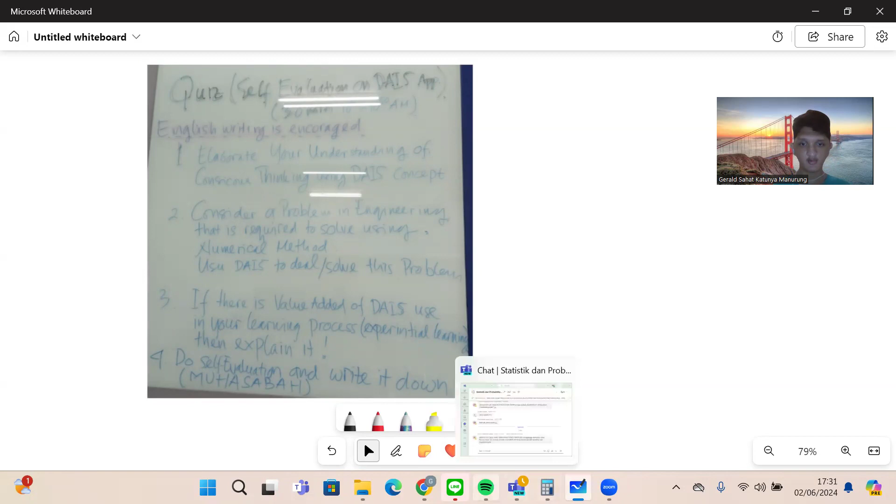Untuk soal penyelesaiannya yang pertama, saya akan mencoba menjelaskan dalam bahasa Inggris. Because English writing is encouraged, speaking in English is also encouraged. The first question is: elaborate your understanding of conscious thinking using the DAI5 concept. Okay, let's move on to answers.

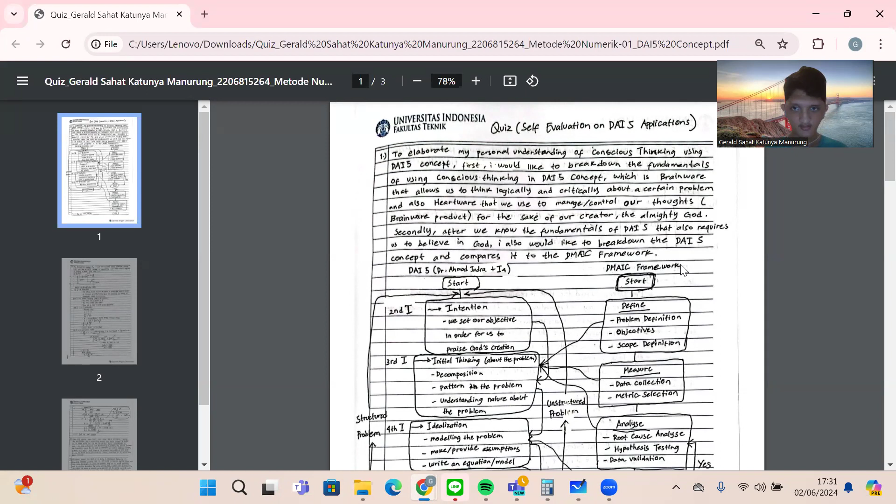Okay, for the first question, elaborate my understanding. So my personal understanding is the conscious thinking is very well used in the DAI5 concept. To elaborate it furthermore, firstly, I would like to break down the fundamentals of using conscious thinking in the DAI5 concept, which requires two things: brainware, that allows us to think logically and critically about a certain problem, and also heartware, that we use to manage or control our thoughts.

And secondly, after we know the fundamentals, it also requires us to believe in a higher power, God. So in order to break down the concept, I would like to compare it to another framework, and in this occasion, I'm using the DMAIC framework. First of all, the DAI5 starts with a starting point, and then comes an intention, which we set as our objective, to focus us in order for us to praise God's creations.

And then we came to the next step, which was initial thinking about the problem. We decompose, we find the pattern of the problem, and then we understand the nature of the problem. Moving on, we came to the next step, which was idealization. We create the modeling for the problem, and then we provide some assumptions to solve the problem. After that, we write all the equations or models required to go to the next step, which is instruction set, where we set some algorithm or completion steps.

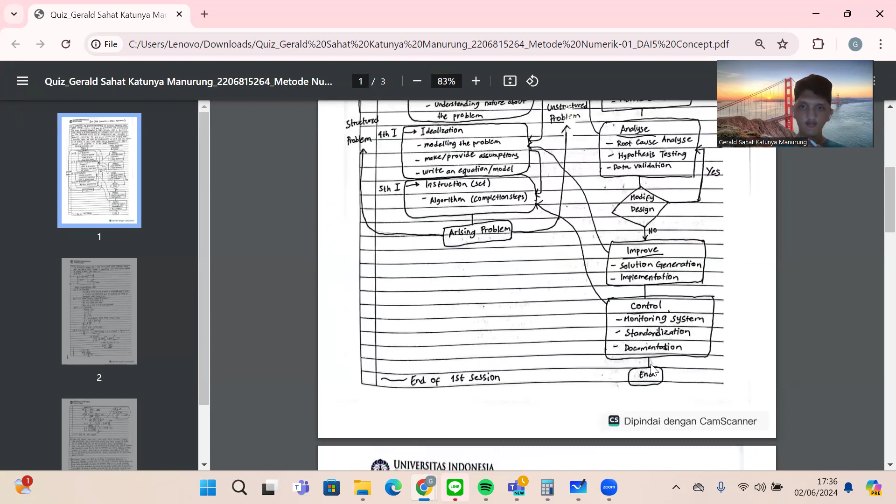And the next step was control, where we monitor our systems and we standardize it. We make some standardization, and we documentate — we document it, documentation — and then it ends with the ending point.

So if we compare the two frameworks or the two concepts between the DAI5 and the DMAIC, as you can see from the screen, the define, measure, and analyze steps of the DMAIC framework are also found in the initial thinking steps, but also the improve and control steps are found in the idealization, and the control is in the instruction set steps. But the one that gets a little upper hand between the two frameworks is that...

The DAI5 concept offers us the freedom to go back to the starting point. On the other hand, when we want to modify the design using the DMAIC framework, it only offers us the option to go to the analyze step.

Okay, moving on to the next question. Consider an engineering problem in the engineering field that is required to solve using numerical methods, using DAI5 to deal with or solve this problem.

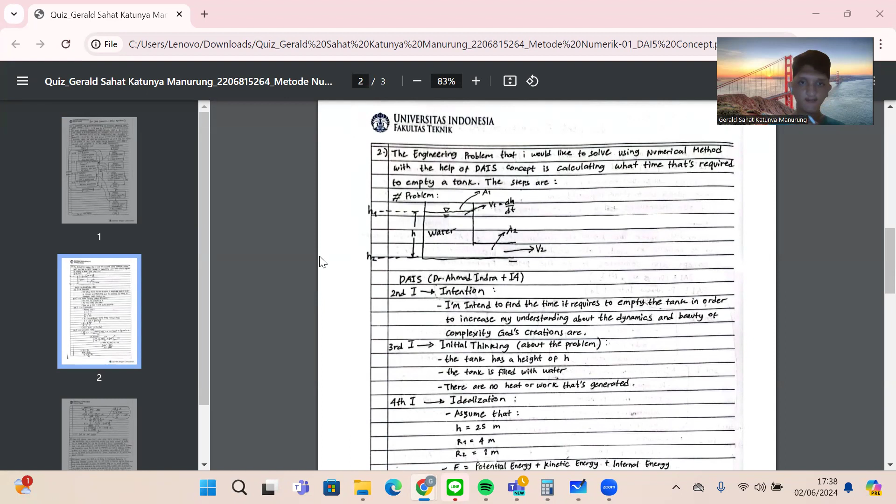For the second question, the engineering problem I would like to solve first is at what time it is required to empty a tank. The problem scheme is like this: there's water in the tank, there's two areas, and there's a difference in velocity and also a difference in height, and so on.

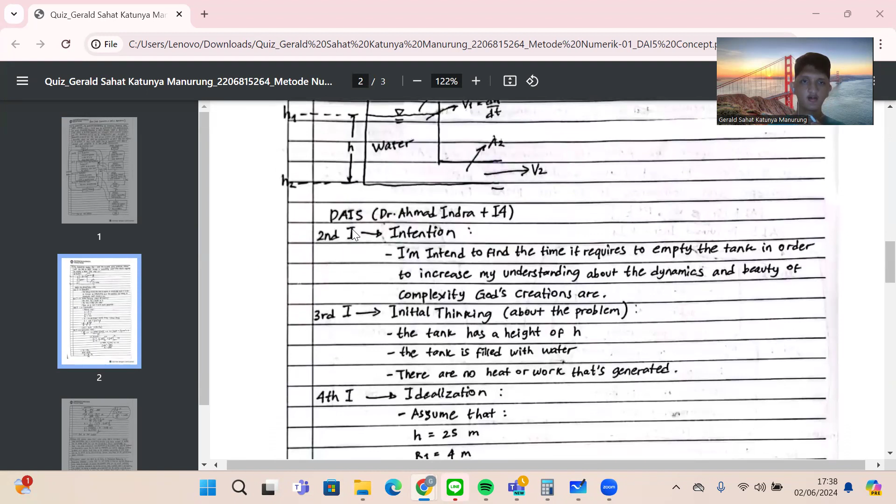After the problem scheme is showcased, the next step is intention: I intend to find the time it requires for the tank to empty, in order to increase my understanding about the dynamics and beauty of God's complex creations.

The next step is initial thinking about the problem, where I make some assumptions. I note that the tank has a height, labeled h, and the tank is filled with water, the fluid is water. The next step is idealization, where I define some assumptions.

The height is 25 meters, the first radius is 4 meters, and the second radius is 1 meter, the smaller one, the exit radius.

E stands for potential energy plus kinetic energy plus internal energy, where the formula is mass times gravity times height, plus half of mass times velocity squared, plus u, where the internal energy here is zero.

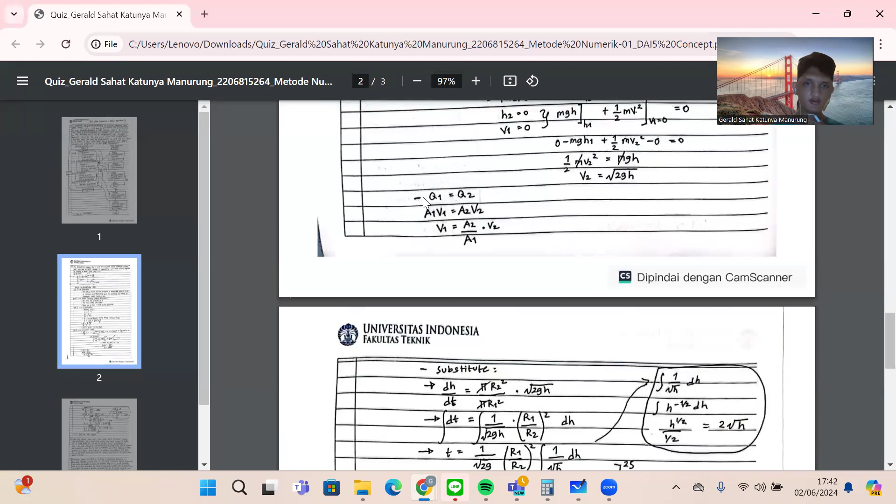After that, we use this equation, the continuity equation, where we find that the first velocity equals the second area divided by the first area, times the second velocity.

We substitute the definitions from the first half, where the first velocity equals the differentiation of height with respect to time, and the area formula is pi times r squared for both areas.

Then we substitute the second velocity with the square root of 2 times gravity times height.

We integrate it, and using the integration, we find that t equals 1 over the square root of 2 times gravity, times the first radius over second radius squared, times the integral of 1 over the square root of height with respect to h. We input our values, and the time required is found to be 36.12192 seconds.

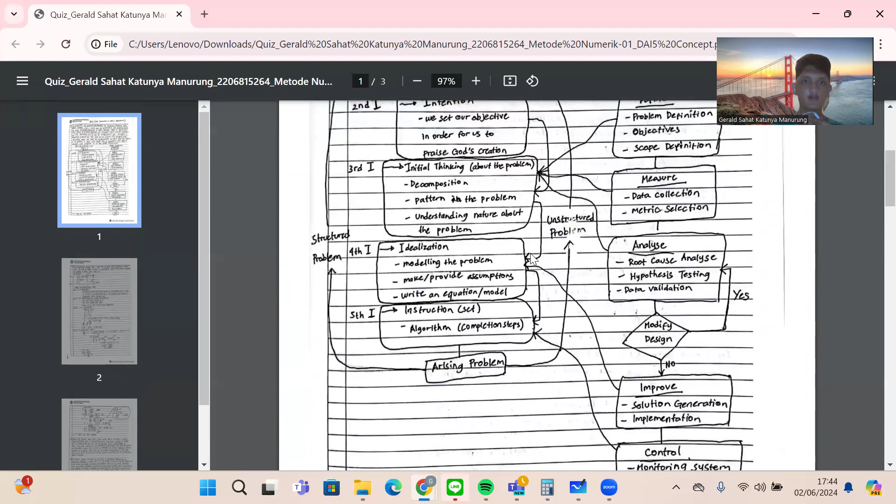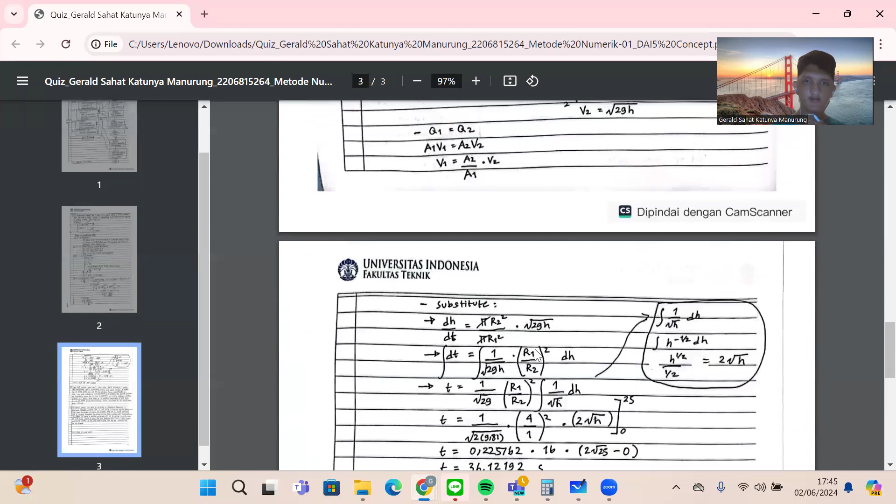Moving on to the next question. We're going to stick with that question, where we add another engineering example that we can solve using this DAI5 concept or DAI5 framework. I'm already prepared with it.

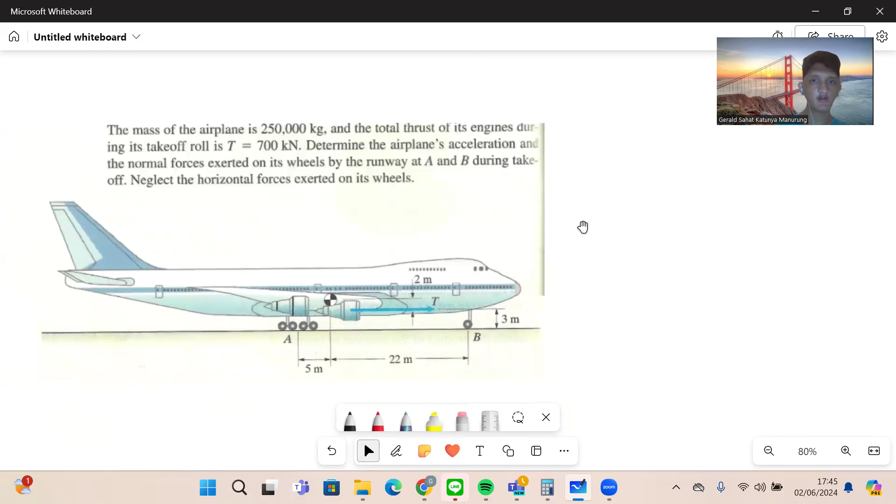This is the engineering problem where there's an airplane with these parameters: the mass of the airplane is 250,000 kilograms, and the thrust force in the engine is equal to 700 kilonewtons. We are asked to determine the airplane's acceleration and the normal forces exerted on its wheels by the runway at points A and B during takeoff. We can neglect the horizontal forces exerted on its wheels.

Okay, now, wait, let me get rid of this first. Where should I put it out? Nah, I'll just put it there.

Okay, first we set our intention, which was to find the airplane's acceleration and the normal forces.

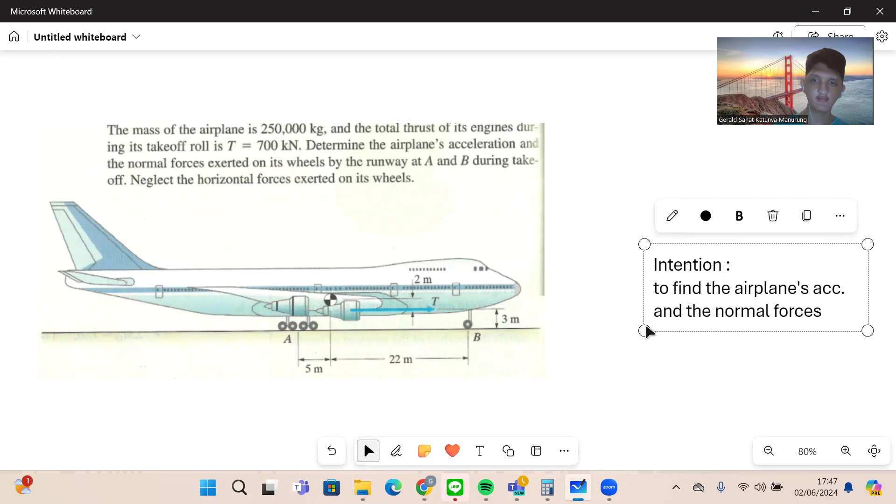Okay, in order to understand how forces act on the plane and the beauty of God's creations are, is that our intention?

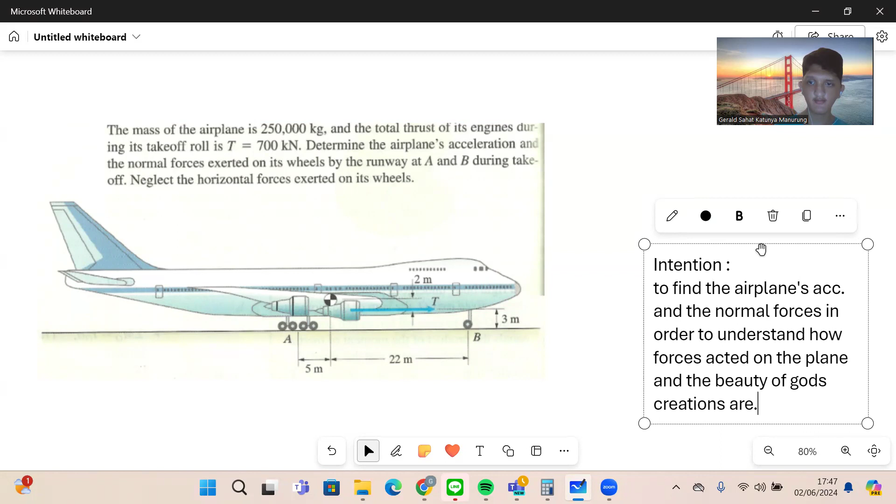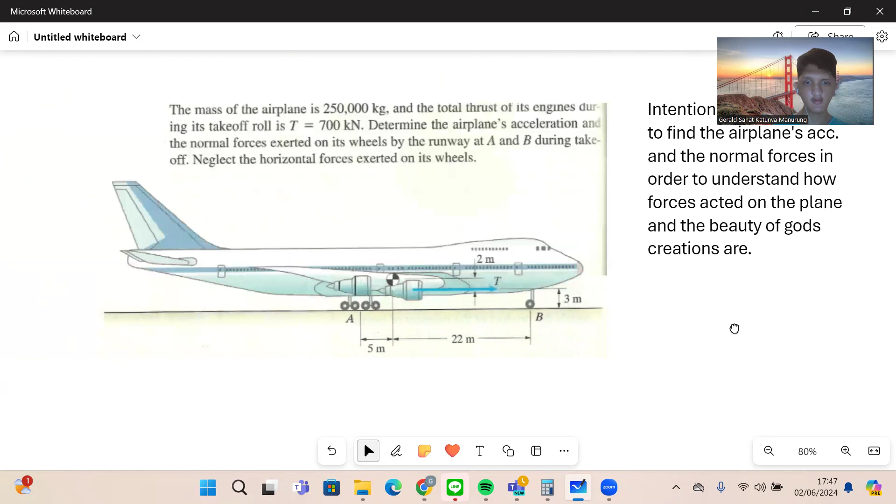Okay, this is the first step. And then the second step is to set the initial thinking about the problem, where in here we can make some assumptions.

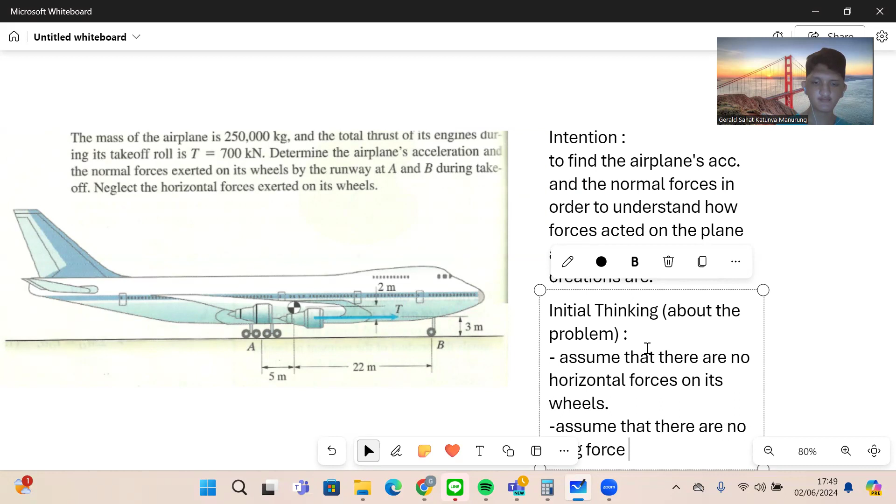Assume that there are no horizontal forces on its wheel, and then I would like to assume that there are no drag force.

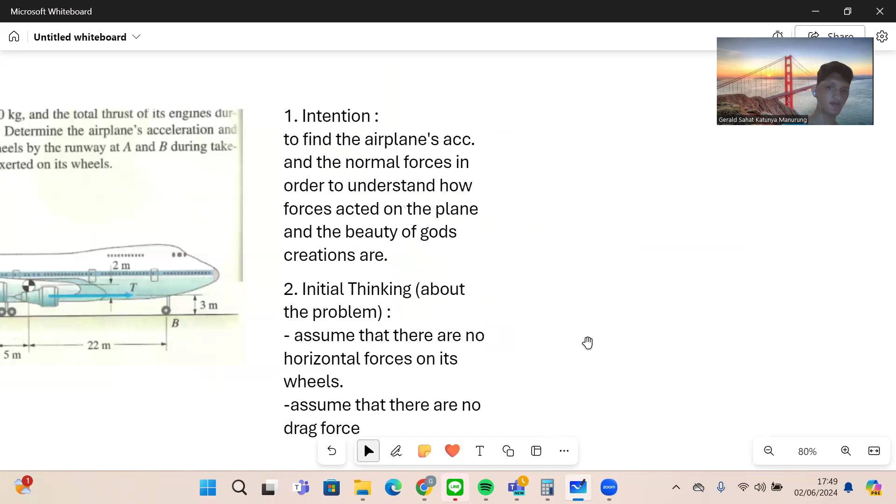Okay, so this is the second step. Let me label it. This is the first one, this is the second one, and then we're moving on to the third one, which is the idealization, we put our models.

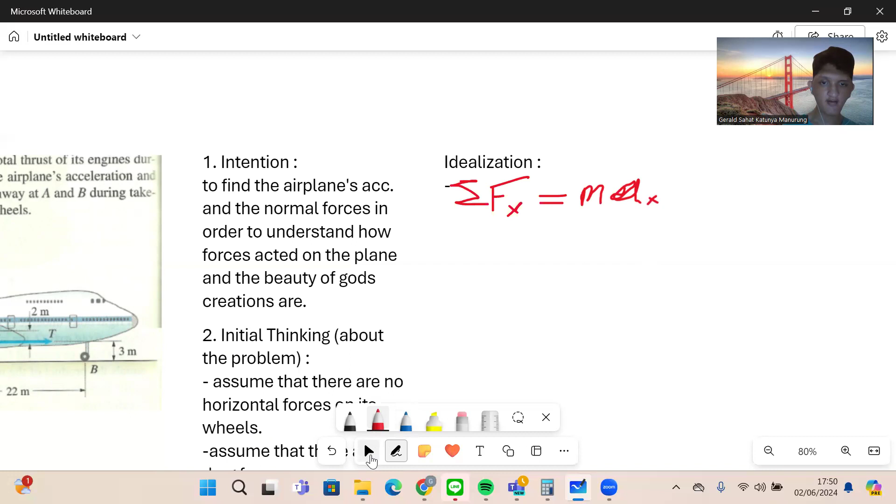We use the formula: total forces acting on the x-axis is equal to the mass times the acceleration on the x-axis. Okay, this is the first one.

The second one, forgive me for my bad writing. Their total forces acting on the y-axis is equal to 0.

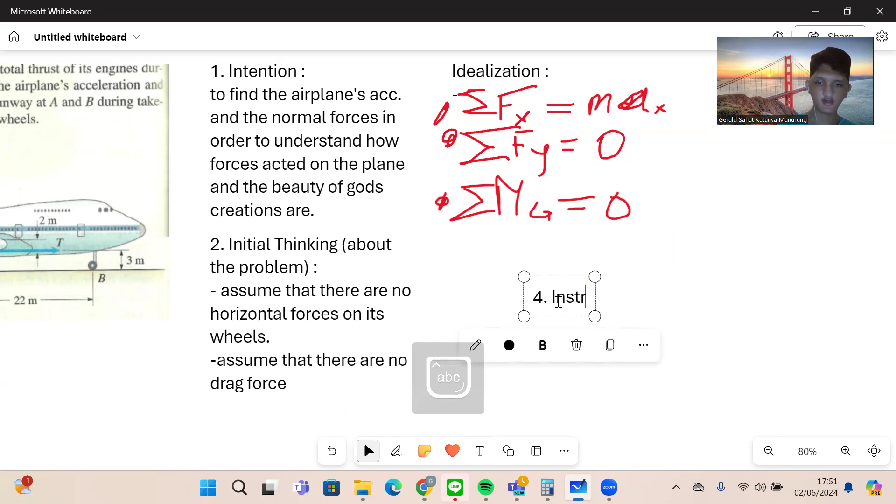And then we also use the total of moment with respective to the centroid is equal to 0 as well. Now we're moving on to the next step, which was idealization — no, I mean, four, instruction set.

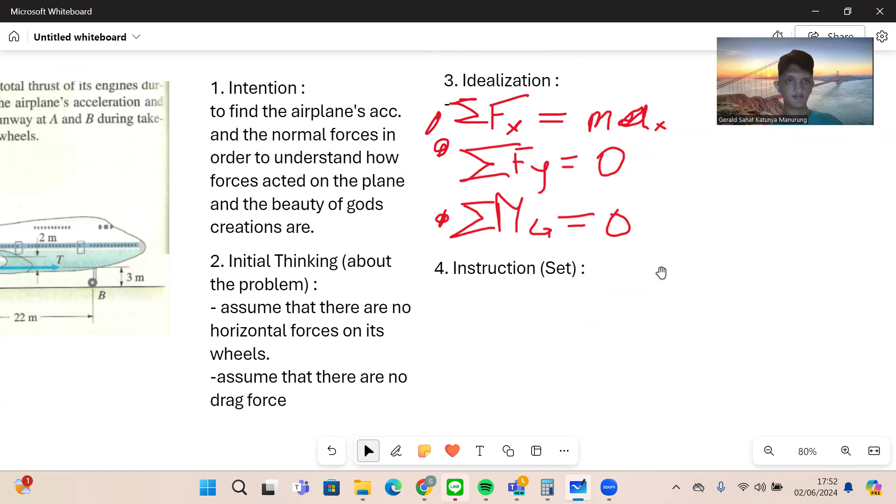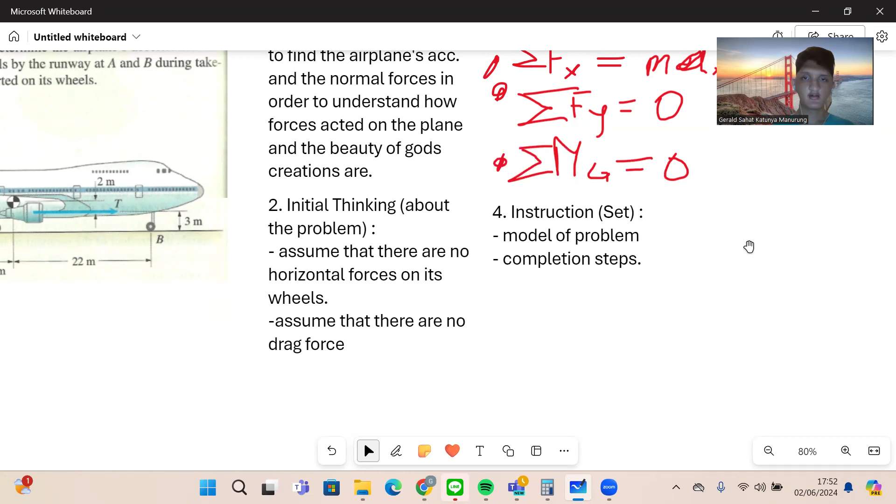Okay, this is the third step. And then in the instruction set, we made a model of the problem, and then completion steps done. Okay, now let's make the model of the problem where we draw the forces.

There is thrust, yes, this is thrust. And then we have the weight of the airplane. We also have, wait—

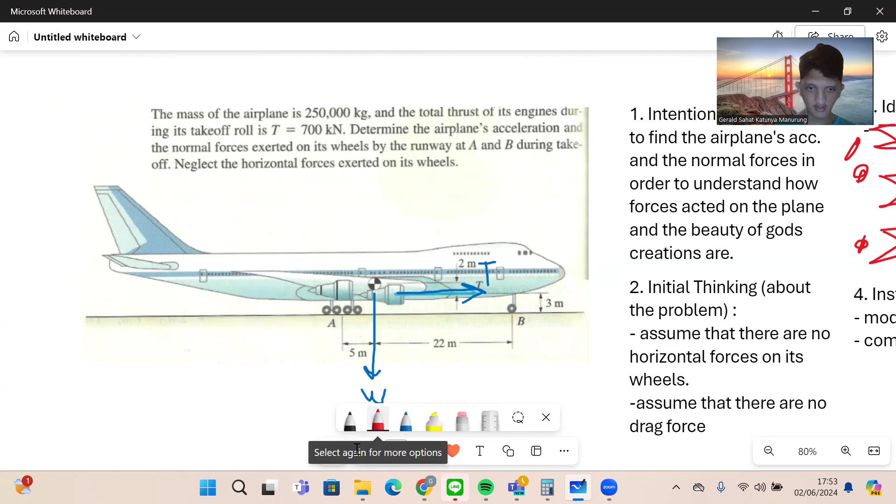We also have the normal force acting on point A and the normal force acting on point B.

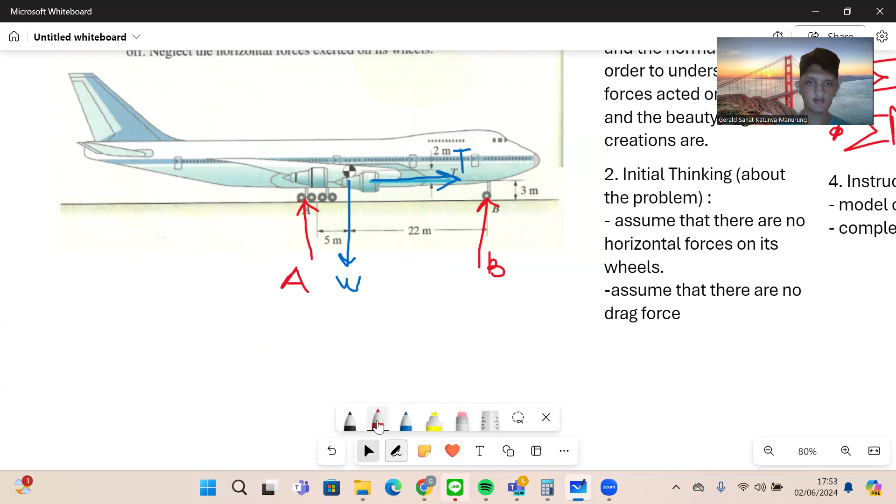After we create the model, we calculate. Okay, now let's calculate it. The first one is the total force acting on the x-axis is equal to mass times its acceleration in the x-axis.

And as you can see in the model, in the free body diagram, the force that acts on the x-axis is the thrust force, and it is equal to—what is this?

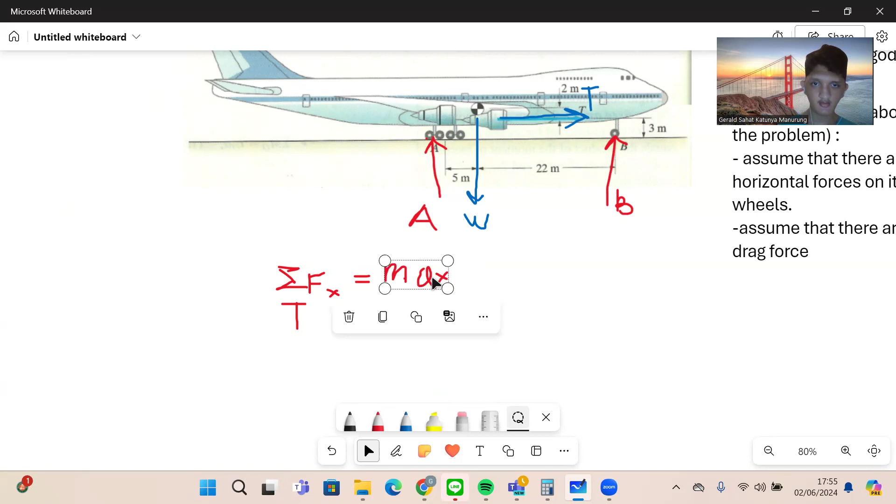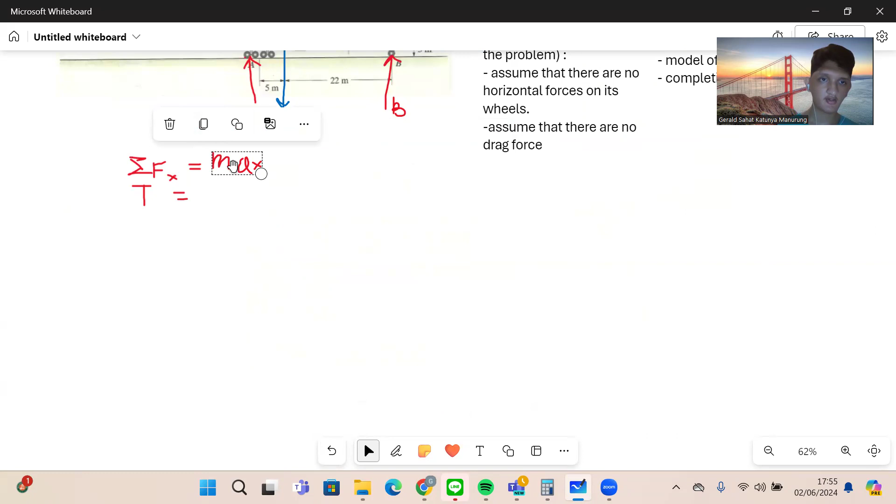Let me make a copy of it. It is equal to its mass times its acceleration.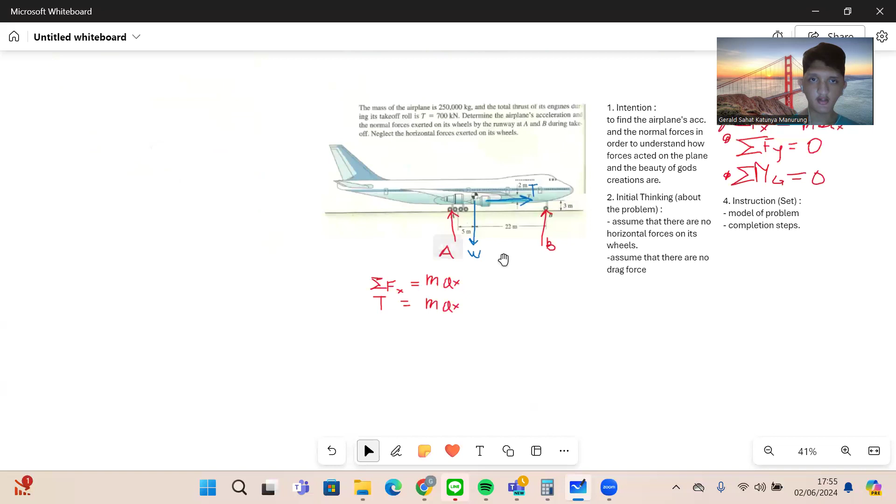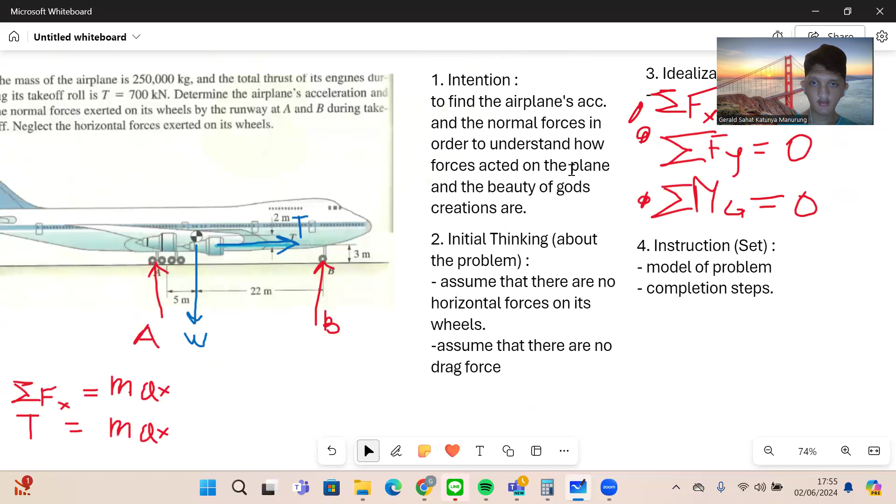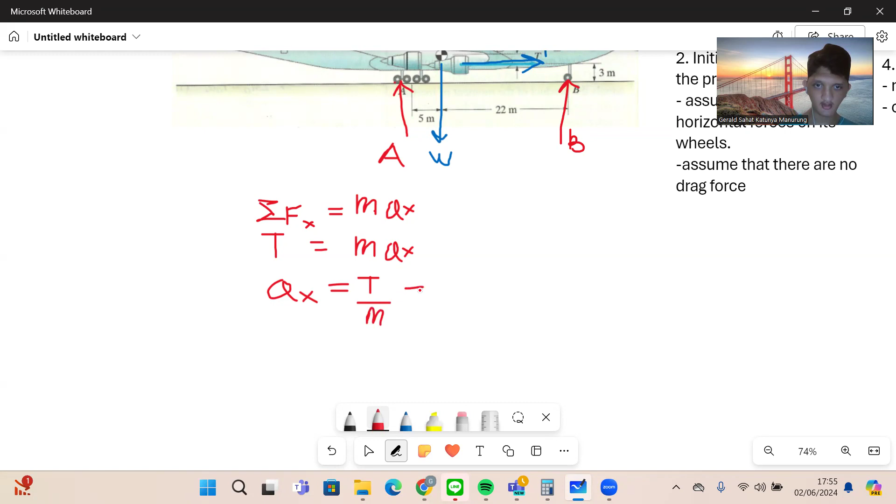And the thrust force is 700 kilonewton. But we are asked to determine the acceleration, so it will become: acceleration in x-axis is equal to the thrust force over its mass, which is 700 kilonewton — forgive me for my bad writing — divide by 250,000.

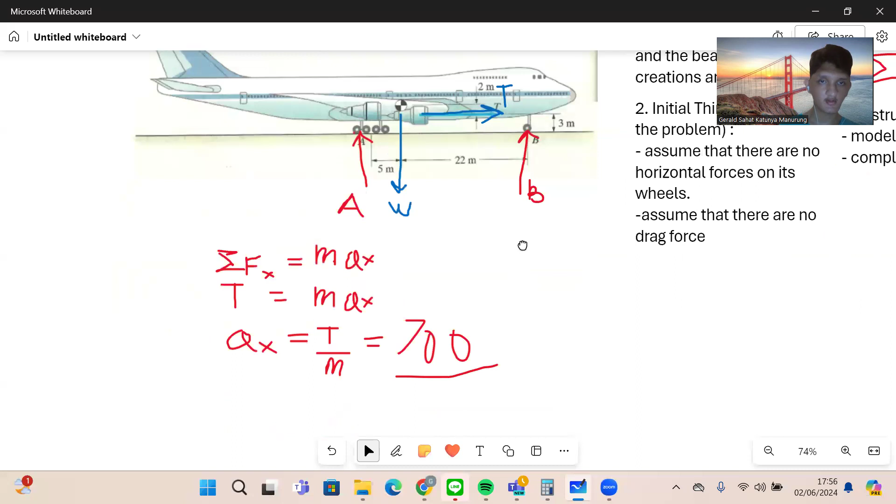250,000. And it is equal to 2.8 meters per second squared.

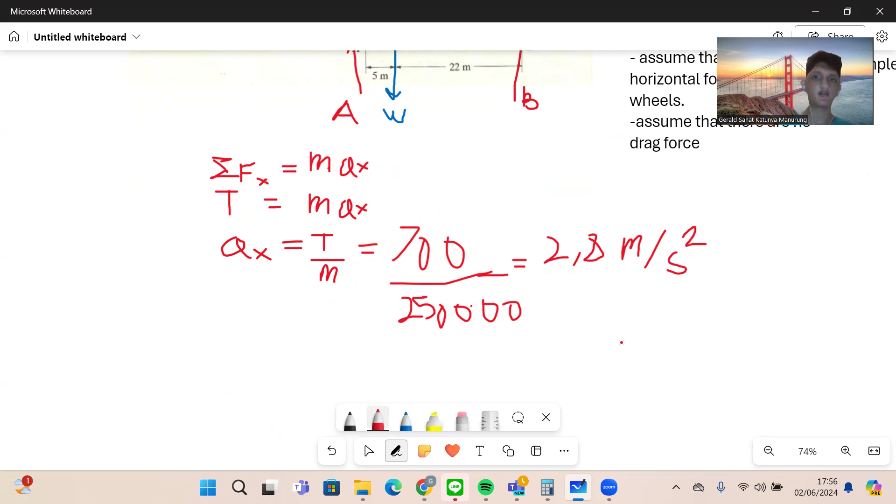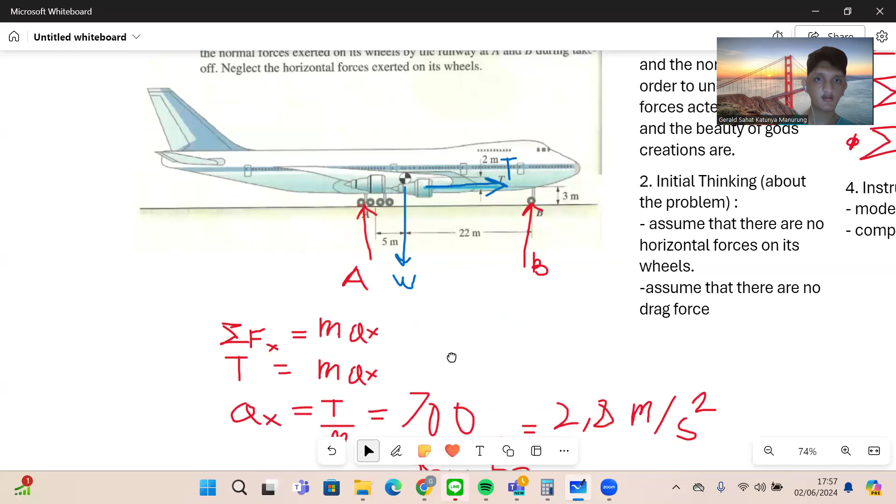And then we're moving on to the next equation, which is total force acting on the y-axis is equal to 0. From the free body diagram, you can see it is the normal force A, normal force B, and the weight force. Assuming that upward is positive and downward is negative.

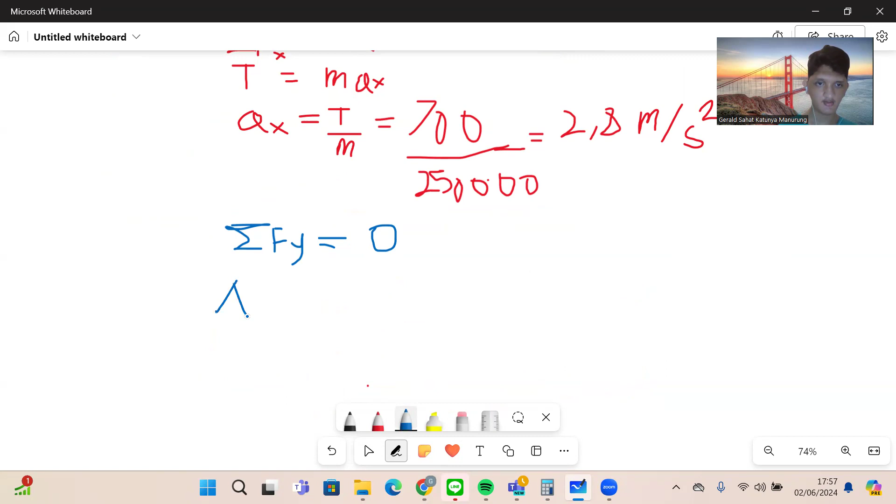So A plus B is equal to its weight. So I'm just skipping some steps to fast forward the completion steps.

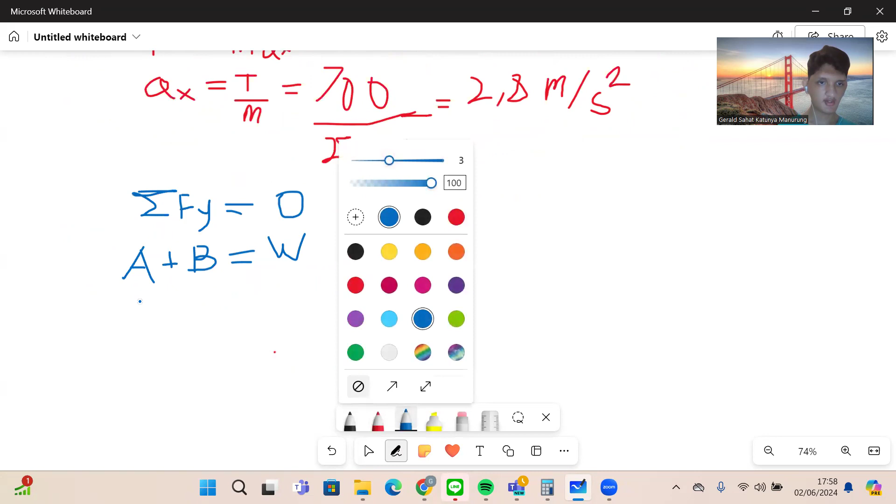Moving on, you can substitute its value. So A plus B is equal to 250,000.

I pick this one, copy, and paste. This one multiplied by the gravity, 9.8, and it gives us 2,452,500 Newtons.

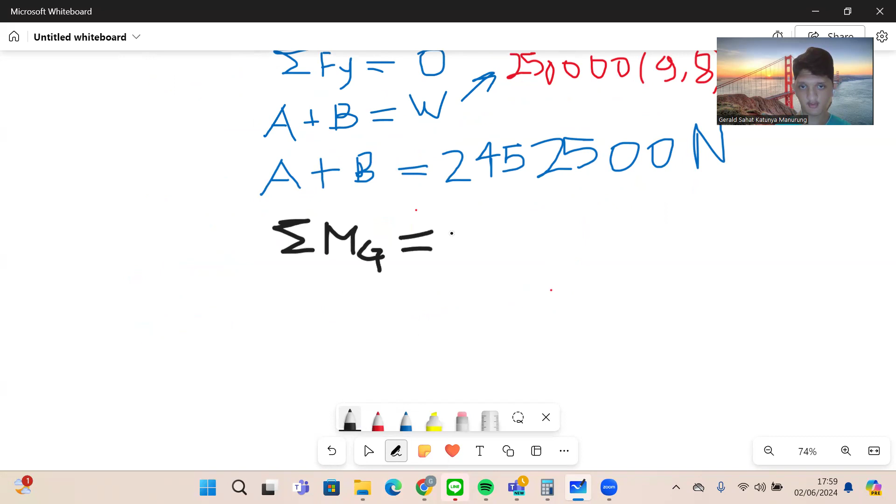Okay, moving on to the next step. The total moment with respect to its centroid is equal to 0, where I assume that going clockwise is negative and counterclockwise is positive.

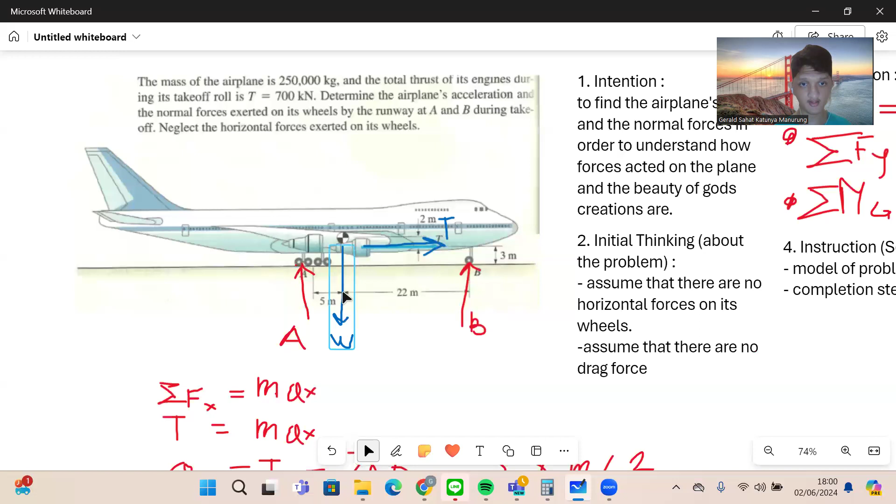So the B point is counterclockwise, the thrust force is also counterclockwise, whereas A is clockwise. The weight is excluded because it has no position — its position is exactly at its centroid. Okay, so this will be—

T times 2, plus the B times 22, A minus... no, I'm just going to fast forward it. So it's equal to A times... minus A times 5 is equal to 0.

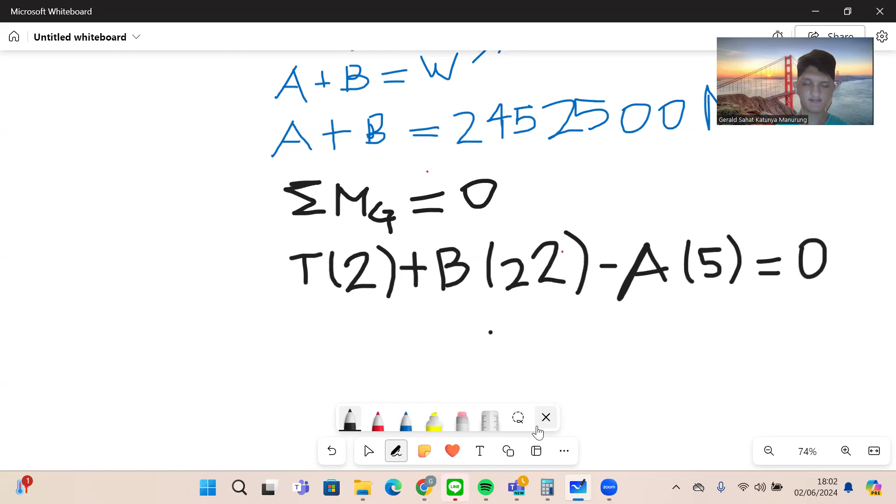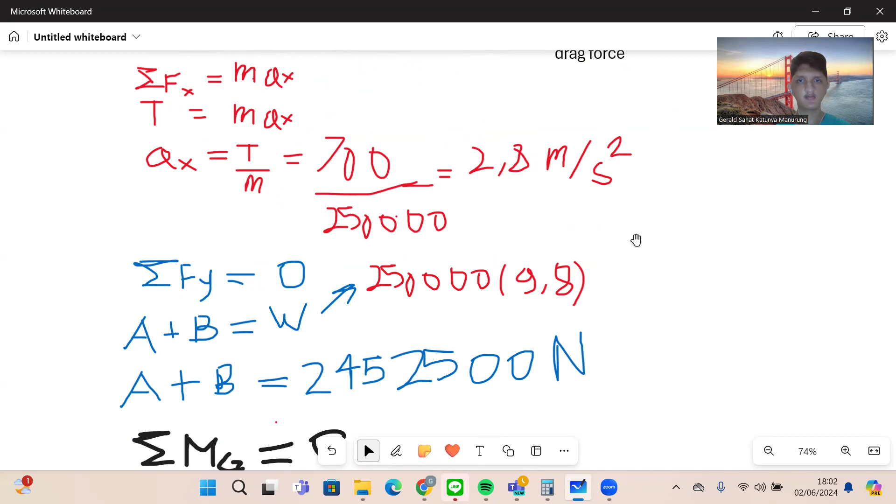So the thrust force is... hmm, no, there's something mistaken. 700 kilonewton. I forgot to add the multiplication times 10 to the power of 3, or you can say it's 10 cubed.

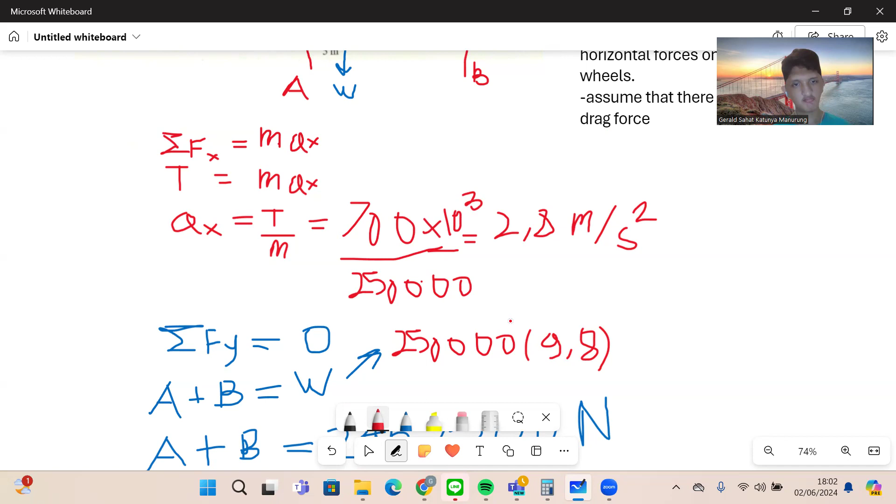Mm. Mm. Mhm. Okay. So, um, okay.

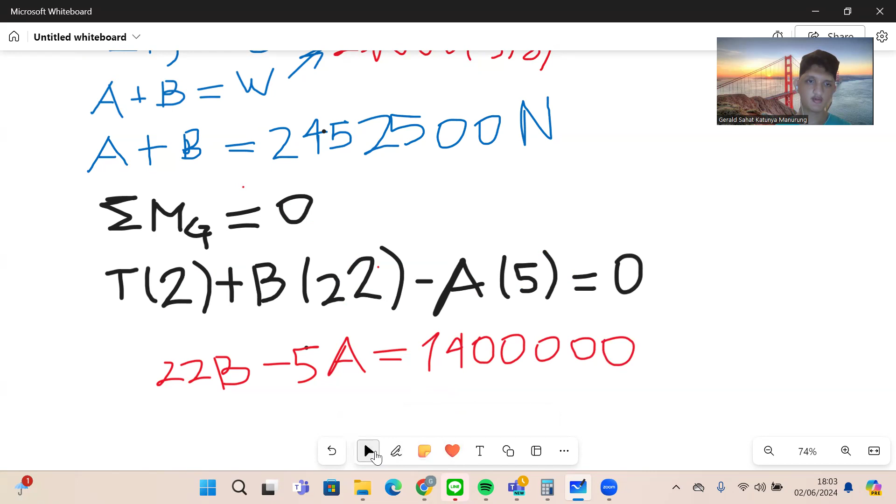T, 22B minus 5A is equal to the thrust times 2, 700,000. So it's... 2 times 700,000, yes, 700,000, which gives us 1,400,000 and 400,000.

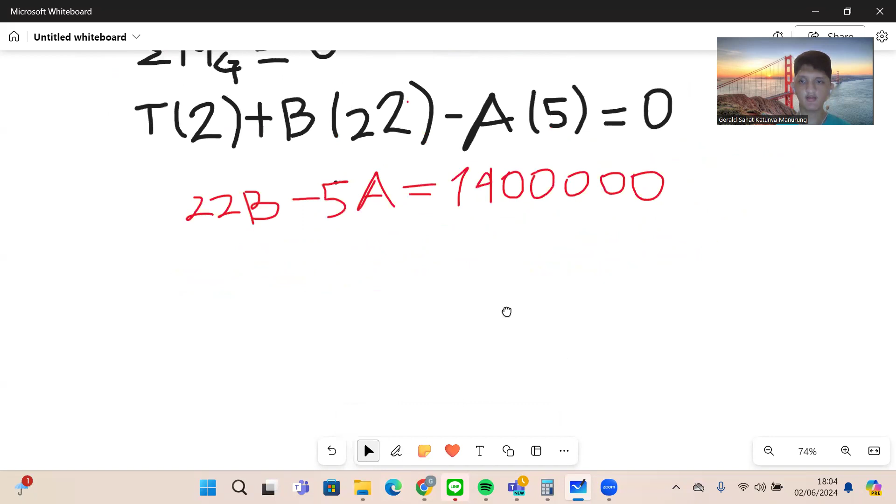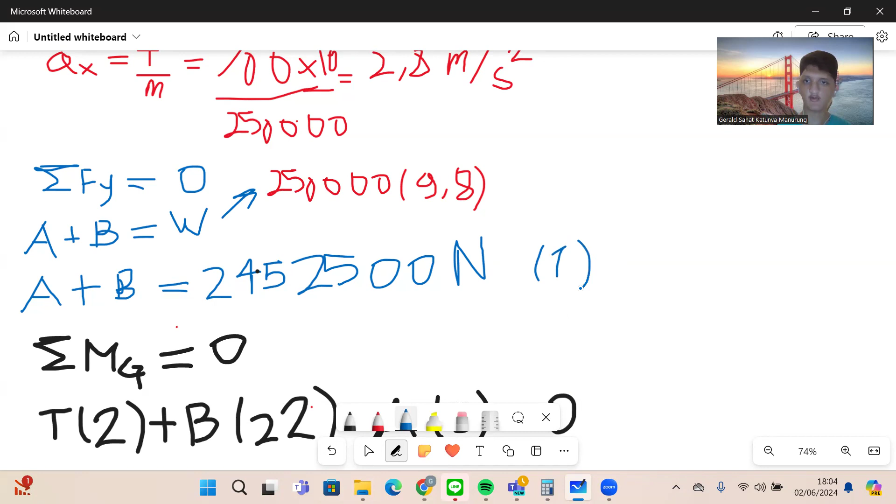And after this, we can label it. I'm labeling this as the first equation. And then I'm labeling this as the second... no, I mixed it up, this is the first equation. You can do it the other way around, but it would not be elegant. We put in the second equation, and then we do elimination using the first equation and the second equation.

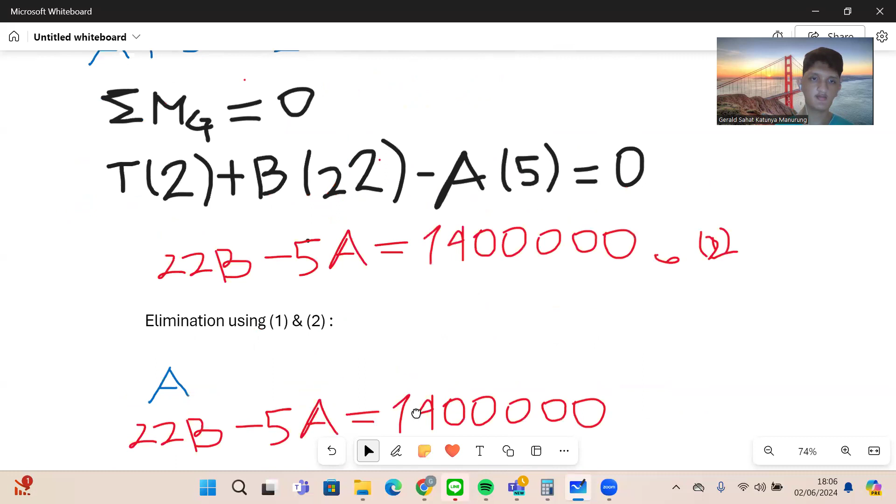A plus... A plus B is equal to... okay.

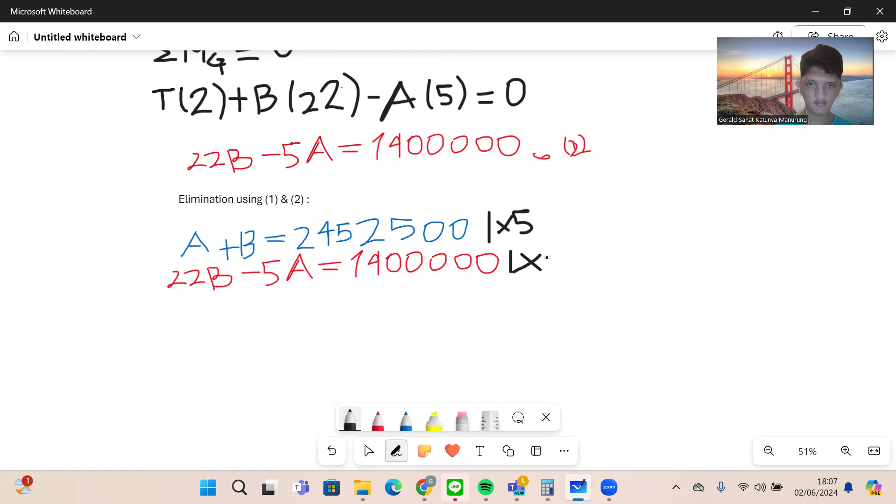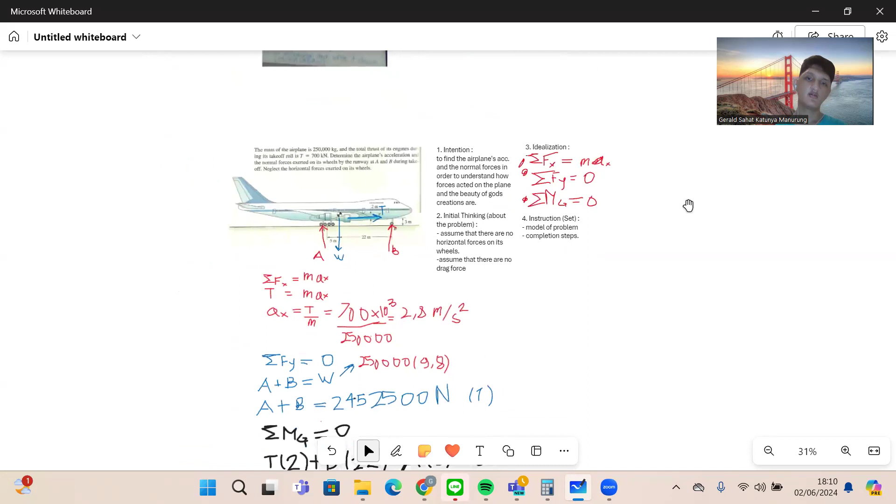Okay, moving on to the next question. That is my solution for the second question, and the third question is: if there is value added of DAI5 used in your learning process, experiential learning, then explain it.

Okay, here I say that from the various cases that I have solved using this concept, the DAI5 concept, I've noticed that every step I did in my learning process using this concept teaches me to always praise God and break down things methodically. By that, I can fully understand how to make assumptions for various different kinds of problems and solve each of it using the procedure, the steps, coherently. It also helps me to be aware of my surroundings, because there are many things that can be derived using this DAI5 concept.

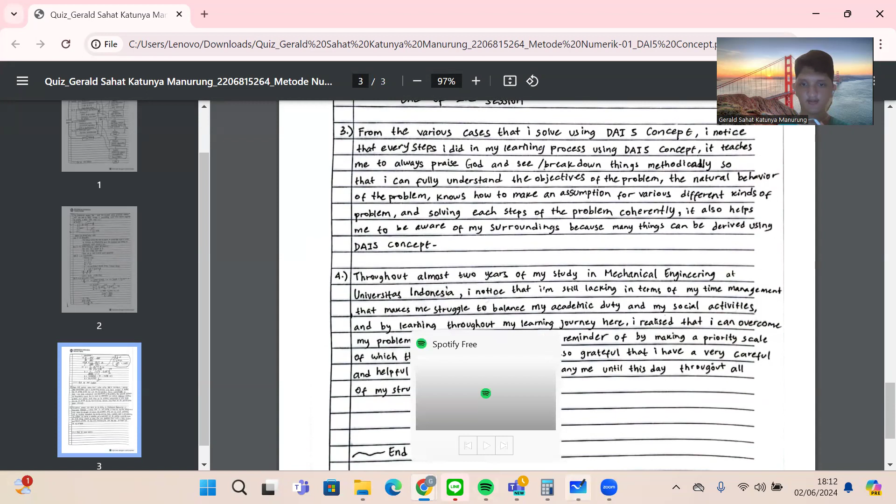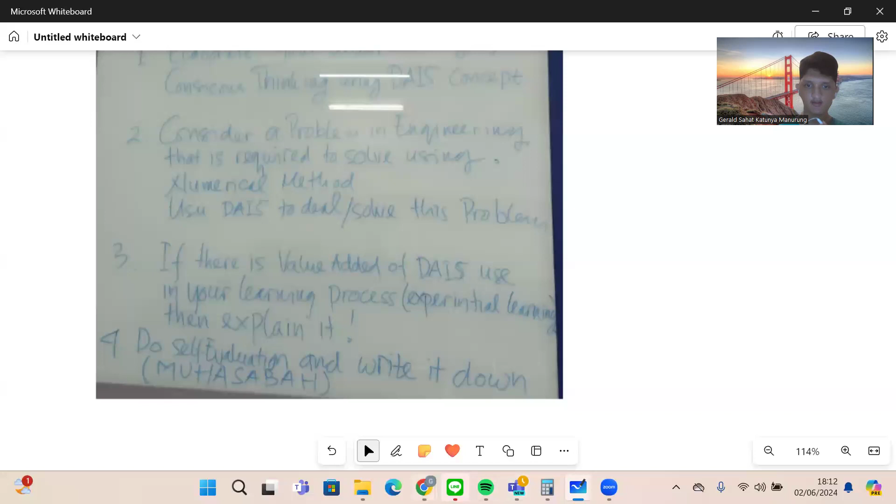Okay, for the last question: do a self-evaluation and write it down. Here it says muhasabah. Okay, throughout almost 2 years, because I'm now in my second year, almost finished my second year studying mechanical engineering at Universitas Indonesia, I noticed that I'm still lacking in terms of my time management skills. So that makes me struggle to balance my academic duties and my social activities.

And by learning throughout my learning journey here, I realized that I can overcome this problem by making some schedule or reminder of it, by making a priority scale, and also deciding which things I should do first. And I am grateful and very happy that I have very careful and helpful friends to help and accompany me until this day throughout all of my problems, all of my struggles.